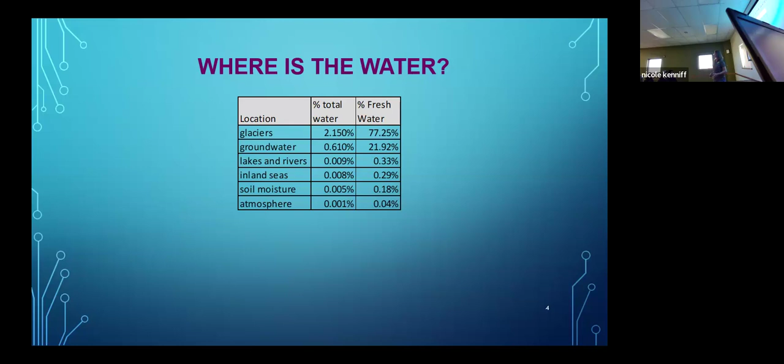Is to get as much water into the soil as we possibly can. And in permaculture, we have the mantra, slow it, sink it, spread it. Right, so take water, slow it down across the landscape, which gives it a chance to sink in, and spread it as evenly as possible. Right, so everything is getting its fair share. So we don't have wet and dry places, we have even, complete soil moisture everywhere.

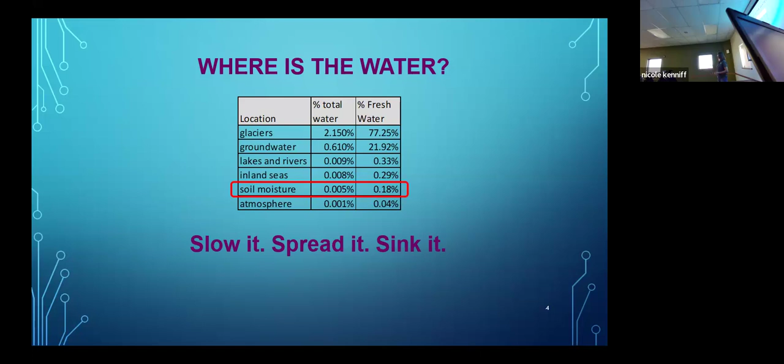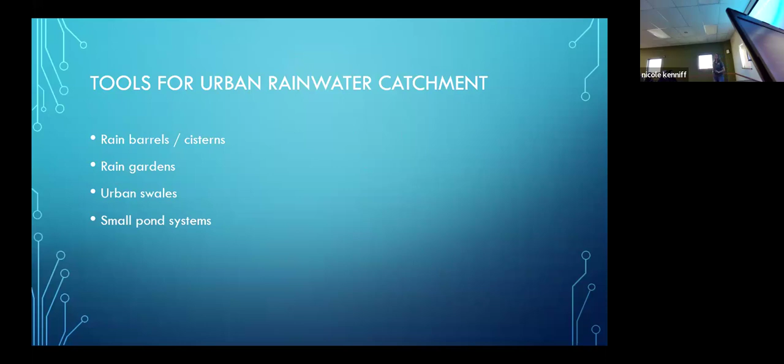Okay. So what we're talking about today is some ways to do that. And we will for sure talk about rain barrels and cisterns, rain gardens, and urban swales, so small scale swales. If we have time, we will touch on micro ponds because they're also cool and exciting, but I don't know if in an hour. Okay, this is our plan.

So since this is a rain barrel workshop, we should probably start with rain barrels. Right? And those of you who are staying for that workshop, we'll be building something kind of like this, right? So rain barrels are nice. This size is pretty easy to find. It's very easy to build for yourself. It's easy to use the water. Like it's a very accessible way to catch rainfall when it happens and use it later. Okay? And there's a lot of benefits to that.

Right, so if we want to gravity feed water, generally speaking, for most of us, we'll just do a quick poll. For how many of you is your roof the tallest thing other than a tree on your lot? So the water is already tall. So all we have to do is not let it fall all the way down yet. And rain barrels let us do that. And so at that point, you can just connect the hose and gravity feed it. You don't have to have a pump for pressurization.

And if you have enough elevation, it takes about 4 feet, then you can even gravity feed a soaker hose with a rain barrel, okay? And it either takes 4 feet depth of water or 4 or 5 feet of elevation over what you're watering to get enough pressure for a soaker hose. If you're wondering, just random data.

The water is clean, right? It hasn't run through soil. It hasn't run through your neighbor's trash. It hasn't picked up who knows what that got sprayed on who knows what. So the water is clean. It is exactly what our plants want. Right? So it's very high value water as opposed to catching the surface flow from your neighbor's yard. Right? And it's often wasted.

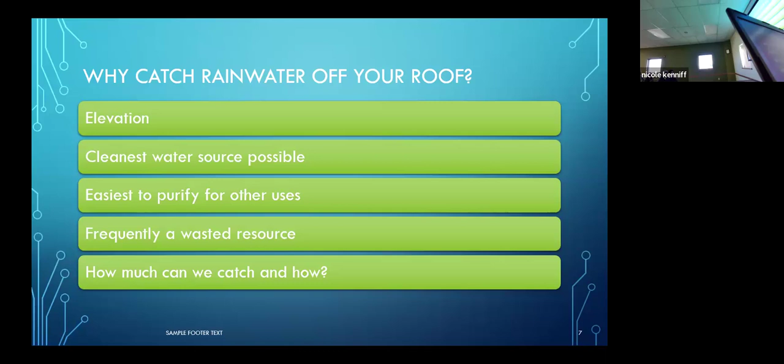So here's a fun question. How much water actually falls on your roof? And so the master gardeners, unfortunately, invited an engineer to come and talk to you. And that means I do math. So would someone like to volunteer how big your house is in square feet on a single level? So if you have a basement, just one level. 2,100. 2,100 square feet. Beautiful. So a 2,100 square foot house, and we're going to do the math for 1 inch of rain. Okay.

So how much is an inch of rain in feet? 1/12. There we go. So times 1/12 of a foot. Someone has to get a calculator out and do that. So you all have a calculator in your pocket. Yeah, that's a phone. Someone divide 2100 by 12 for me, please.

So you didn't know you were gonna have to work in this workshop.

What? 75? 175, beautiful. So 175 cubic feet. Now multiply that times 7.48. That's how many gallons are in a cubic foot. You don't have to do it, that's 1,309. That's right. Okay. 1,309 gallons come off of that roof for every 1 inch of rain that falls.

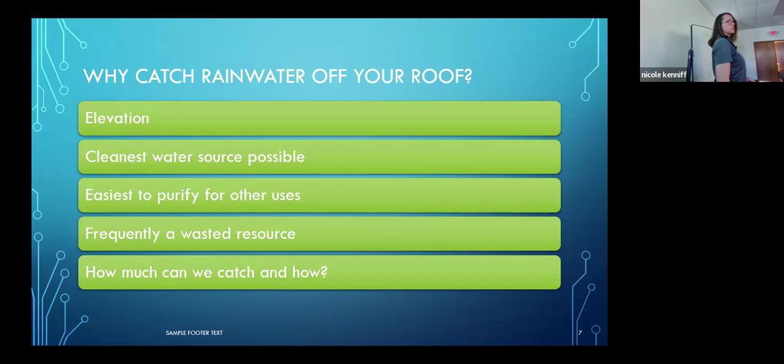If we want an even more fun statistic, if you happen to live in or around Lawrence, multiply that times 39, which would be the average inches of rainfall that fall in Lawrence in a year. 51,051. 51,051 gallons a year that you are largely sending down a storm drain.

And see, you just brought up the reason that I usually introduce this slide in my class, but isn't that cute? So the PDF of this will be available, it has that math problem on it.

Which means that really we should be looking at cisterns more than rain barrels. Rain barrels are a great accessible way to get started. Does that not account for the pitch of your roof? Doesn't matter, because the rain is falling straight down. So however steep your roof is, it's still vertically the same amount.

Now, if you want to be super precise, then you would account for square footage of porches and eaves and things like that. And if you're an engineering nerd like I am, then you can look up your house on the county GIS and you can use a polygon and map out the shape of your roof and find out exactly how many square feet of roof you have. And you can be very, very precise if you would like to do that. I wasn't going to do that to you guys today. You can, and that would be the most precise way to do the calculation. Yeah, absolutely.

So cistern system. These are 400-gallon cisterns installed at the Permacommons Community Garden at 14th and Pennsylvania. If you want to go actually visit the picture, it exists. And that is really the scale that you would need to be at if you want to do meaningful rainfall catchment on your house. Okay, so I'm going to plug that in to your brain.

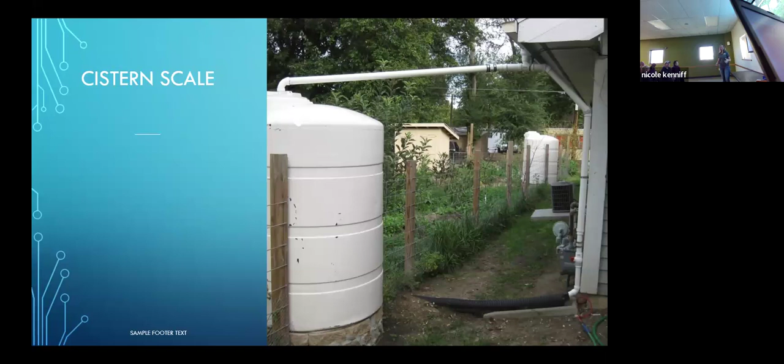Now, whenever we look at these systems, there are some elements of installing a rain barrel or cistern that are important. And some are more important the bigger the thing is. So the first one is some way to keep crap from getting in the barrel. We don't really want all the leaves from the trees that are on your roof to end up in the barrel. We don't really want the dirt that ends up on your roof in the barrel. We don't want little bits of asphalt from your asphalt shingle roof in the barrel.

Now, for those that are very concerned about watering plants with water that came off of an asphalt shingle roof, generally speaking, it's fine. There's not actually enough toxin in that water to cause a problem for plants. It is diluted enough. Now, drinking it is a different thing. So we would take other steps, but for plants, it's generally just fine.

So for a smaller rain barrel type system, usually all you need is a screen. And we'll be doing that in the workshop today, I believe, putting on some kind of a leaf screen. Okay, well, we'll talk about it then in the workshop. For something of the 55-gallon rain barrel variety, you're just getting window screen mesh and putting it over wherever the water is coming in.

I noticed in the last picture, you actually had a downspout also in addition to that. So that's a first flush diverter. That's the next thing. Whenever you step up into a larger system, a 55-gallon rain barrel at the end of the season, you're probably going to dump out, and it's pretty easy to tip over, hose out and clean. You're not going to do that with that guy, right? So if some stuff goes by your screen on your 55-gallon rain barrel, the world is not ending. On this one, we have a problem.

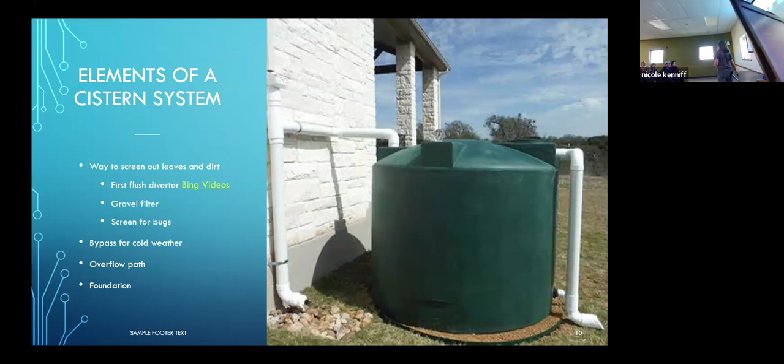All right, so we already talked about that. So moving on to rain gardens. Who here has been around a rain garden before? Do we have a mental picture of what these things look like? About 50-50. Okay, so we'll start with what the thing is.

So a rain garden is not a pond. It's a shallow depression in your yard that's designed to fill up with water when it rains and then hold that water long enough for it to soak into the ground. Right, so this is a catchment thing. Not designed to have standing water all the time. Yeah. For those members of the public who are here who might not have a mental picture, we have one right in front of the extension office, if you'd like to go visit one.

Yes. So most of the time, this looks like a depressed flower garden. And when it rains, it looks like a small pond. Okay. It is a pretty simple system for getting that large, we talked about large rain events. We've all experienced them. Right. So if I catch 400 gallons of the 1309 that fall on my roof in rain barrels and cisterns, and then I direct the rest of it into rain gardens, it's still going to soak into my landscape.

And water moving through soil goes 300 to 500 times slower than water moving over the surface. Which means if it would take 5 minutes for water to get from my downspout to the storm drain, it's going to take months for it to get that same distance through the ground. Okay, and so if what I really need is to hold my 1 month of rain that fell tonight for the next 3 weeks until I get next month's rainfall in one night, I just did it. Right? I just got it into the soil profile and it will be there for the next 3 weeks. Okay, so that's really what rain gardens are letting us do.

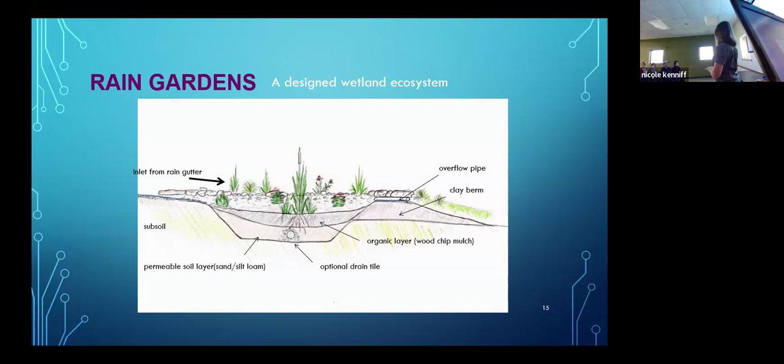So rain gardens also, I'm assuming that I'm talking to a whole room full of plant people. Is that a pretty safe assumption? Yeah. You can plant so many different things in a rain garden. Because there are plants that really want to be sopping wet and then completely dry. And they love the bottom of a rain garden.

And there are plants that hate having wet feet but are thirsty. And they really like the berm of a rain garden. Because the soil under the rain garden is wet all the time, but that berm is not. And so they can send their little roots down and find the water where they want it and have their other roots be nice and dry, and our prissy plants can be very happy.

And if we stretch out a little farther around the garden, the whole area around it will have more moisture in the soil than areas that are not close to a rain garden or a micro swale. We're creating concentrated moisture. And so plants that need more water than average, the ones that you are dragging yourself out to water in the middle of July when it's 110 degrees, can be planted close to the rain garden, and they will need radically less and possibly no water.

So this is the magic of water moving slowly through the soil once we finally sink it in. Okay? And so the presence of the rain garden gives us lots of flexibility in potentially a tiny space. And you can plant so many different things. Okay, so there are example plants up here that are mostly natives. This is a layout of a rain garden in Kansas City.

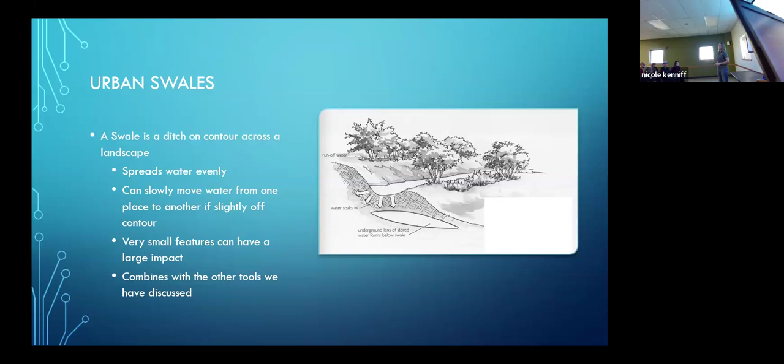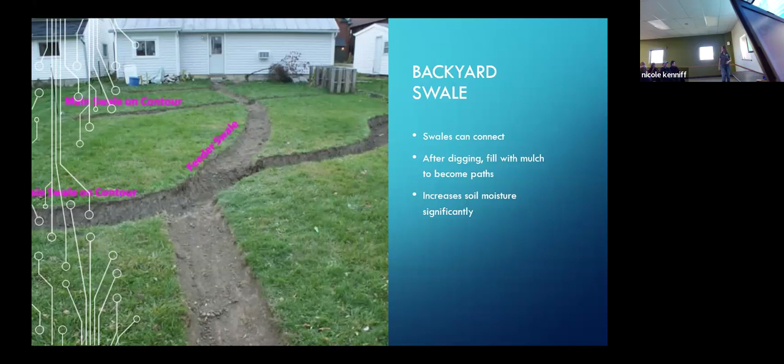But your mileage may vary. Right? You can do what you want. Okay. All right. So let's look at kind of the time lapse. Not a very good time lapse because I'm not quite that fancy.

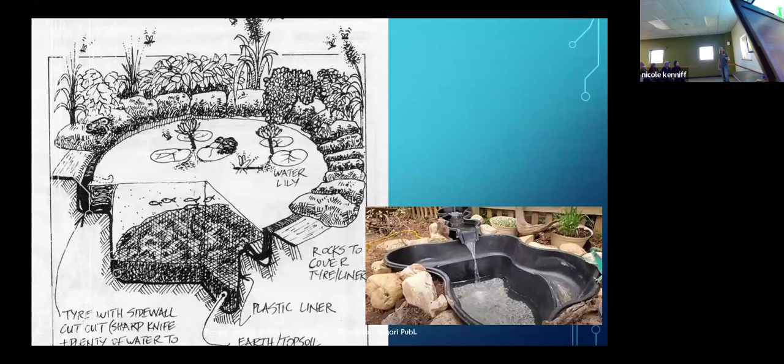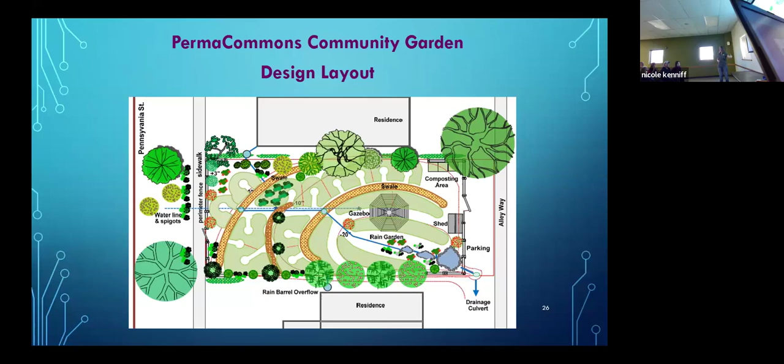It's really pretty. So do those 2 residences partner with them because you're using the water? Yes, they got their permission. It's not a co-op. So it's kind of a fun story. So the folks on this side, she also is a fun plant person. And she thought it was so cool that the garden could use her water. And she was like, sure, absolutely. You should put a rain barrel. And she has a lot of fun talking to the gardeners when they're in the garden. And it's just a fun relationship.

The other side is actually city-owned low-income housing. And so it's a rental. So people circulate through. So they worked out with the city as the landlord to be able to put those rain barrels, and the condition is that they do all the maintenance on that and the gutters, and that they clean on some frequency the leaves out of these gutters, which is helping them, right, to fill up their rain barrels. So that was the agreement they made. And the city owns this lot, so that made it a pretty easy conversation to have.

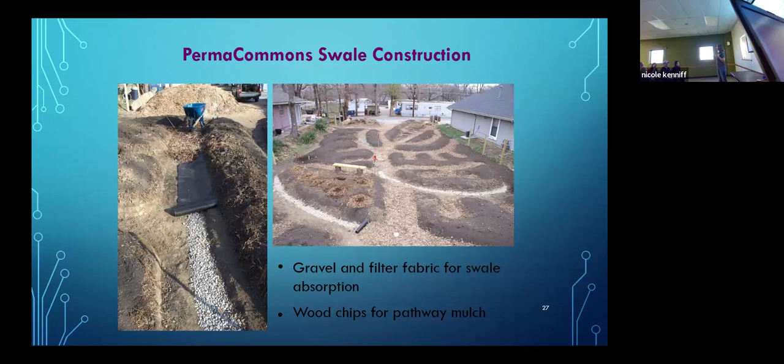So, yeah. Is one more work than the other, like the mulch that you have to dig out fairly frequently? Is this more? You still have to replace the mulch here. Because it turns into soil and soil grows weeds and then your pathway is in progress. And so you still have to do that every year or two. So I don't find it to be that way, but other people disagree.

And that's okay. Just getting older.